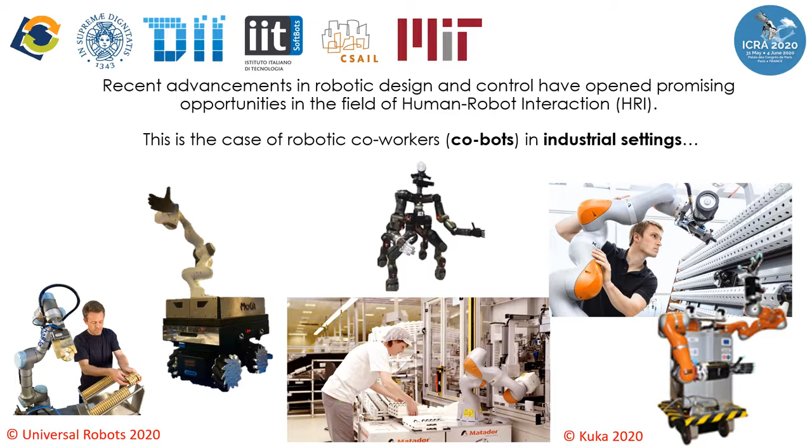Recent findings in robotics have enabled promising opportunities in the field of human-robot interaction, for example with the development of collaborative robots in industrial settings, but also with companion robots that can provide assistance in daily life activities.

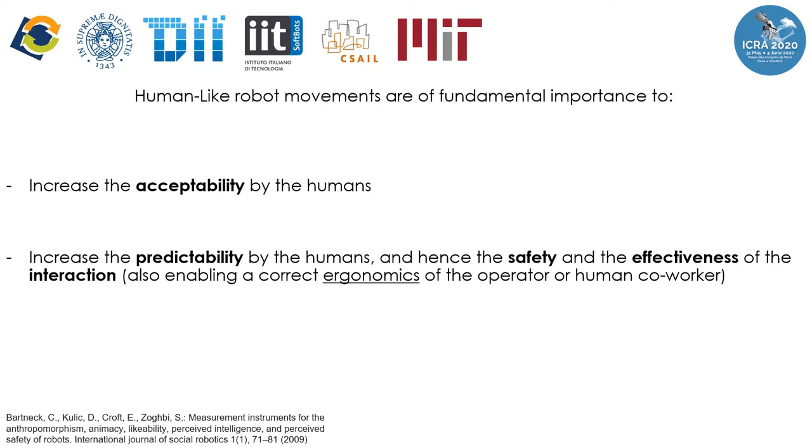All these applications share a common important characteristic, that is human likeness. This is important since it increases the acceptability of the robot by the human and improves the predictability of the motion itself, positively affecting the safety and effectiveness of the interaction. It is then clear that the generation of human-like movements is fundamental for the next generation of humanoid robots.

State-of-the-art solutions typically rely on the optimization of arbitrary cost functions or capitalize on heavy learning methods. However, this usually comes with certain limitations, such as limited motion variability and the need for very high-dimensional datasets.

In this paper, we propose a new architecture that is able to overcome these limitations. To do this, we leverage the definition of a basis of principal functions extracted from human movements. A reduced number of these functions is then enrolled in a planning problem. We defined an incremental procedure that enrolls the minimum number of these functions tailored on the degree of movement complexity required for the specific task. And finally, we defined a procedure to map the obtained trajectories on a generic redundant manipulator.

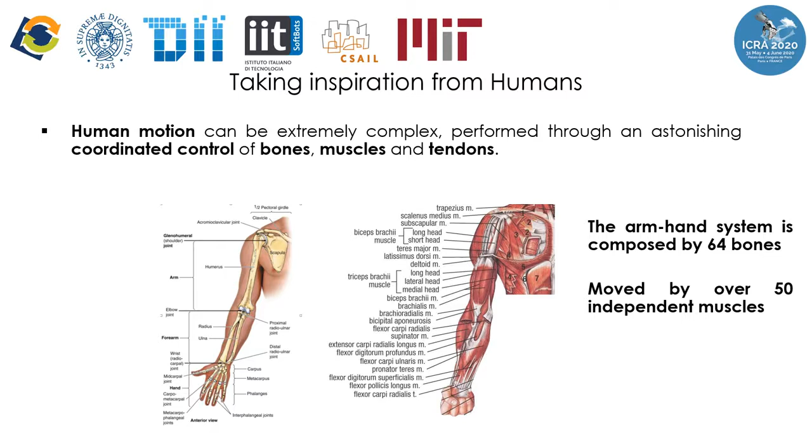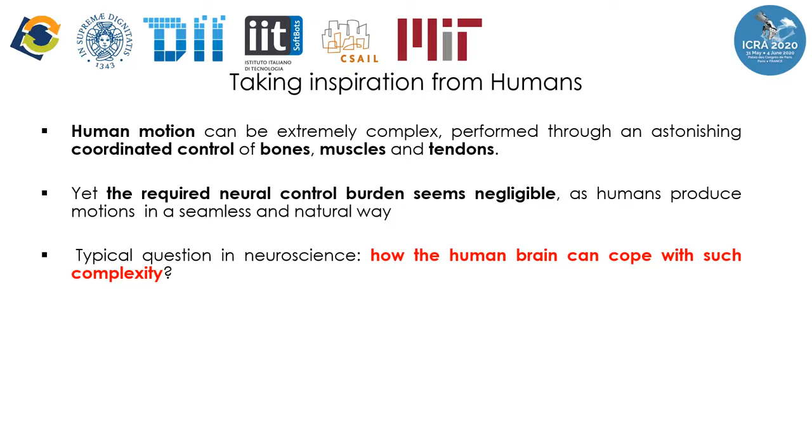Looking at humans, we observe a significantly high complexity, with more than 50 independent muscles used to move the upper limb. Yet, the effort required at the neural level to control such complexity seems negligible. So the typical question is, how can the brain cope with the abundance of our body? And this, in robotic terms, becomes, how can I simplify the problem of motor control to provide design guidelines for robots? We then need a tool to reduce the functional dimensionality of the movements.

To this goal, we used functional principal components. This can be regarded as a functional extension of principal component analysis. Each functional principal component will be a time vector, and a combination of a sufficient number of functional components can reconstruct all the movements.

And then we come to the functional analysis. The idea is to identify the first functional principal component as the function that minimizes its distance with respect to the entries of the dataset. Then we can define a second functional principal component that again minimizes its distance with respect to the entries of the dataset, with the additional constraint that this is orthogonal to the first one. And so on with all the other components.

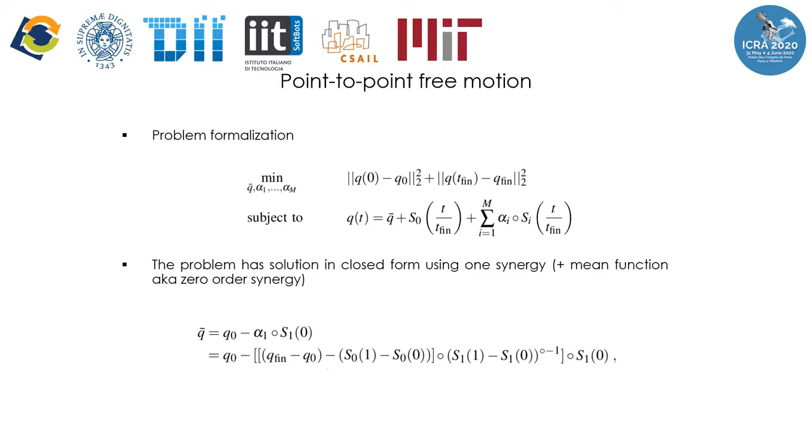The fact that we don't need to optimize for the generation of point-to-point motion gives the opportunity to include other characteristics, such as obstacle avoidance. We extended our implementation to the obstacle avoidance case by including a second term to the cost function. The role of this second term is to maximize the distance between the whole robot during the movement and the obstacles.

A recursive numerical routine has been implemented to solve this optimization problem. At the first iteration, a solution is searched with m equal to 1. In case the solution does not reduce the error below a desired threshold, the procedure is repeated by increasing the value of m, until the problem is solved with the desired accuracy.

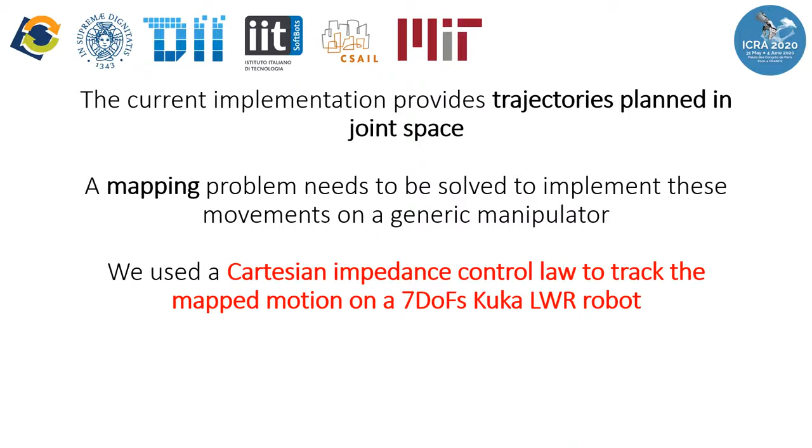A mapping problem needs then to be solved to implement this on a generic redundant manipulator. This is performed in this paper through a Cartesian impedance control. The torques provided to the robot will include a term that compensates the dynamics of the robot, its inertia, Coriolis, and gravity contributions. And then we will have a term that minimizes the error and its derivatives between the actual robot end effector and the endpoint of the 7 DOF model we used to plan the movement.

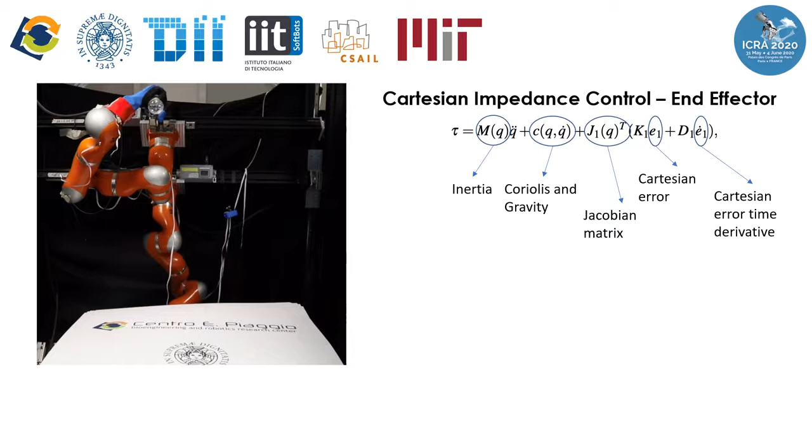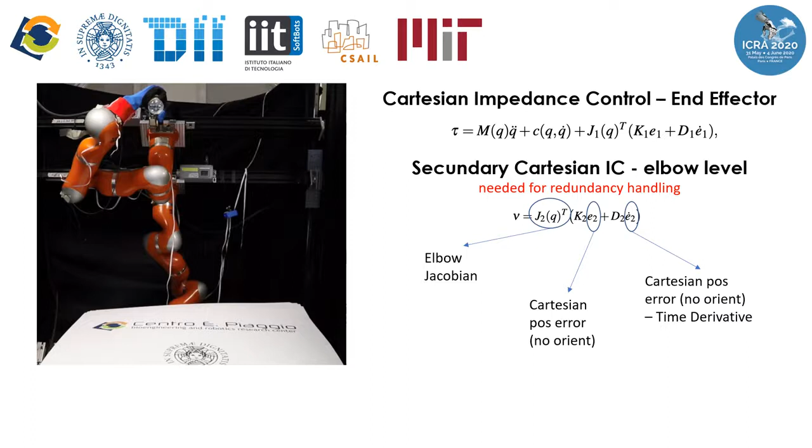To deal with the redundancy, we used a second controller at the elbow level. The goal of this second Cartesian impedance controller is to minimize the distance between the elbow of the robot and the planned motion at the elbow level. To keep the effects of the control uncoupled, we project the second controller in the null space of the first one.

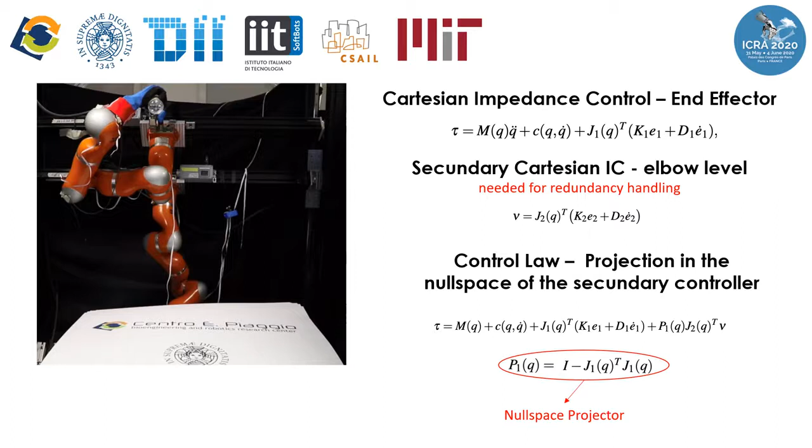Here we show an example of a typical reach-to-grasp movement in which the robot needs to move toward the left side of the table. The movement is mapped on the robot with good accuracy and preserves the characteristic bell shape of the velocity profile during the motion. In all our tests, although some oscillations are introduced by the robot, the jerk values are always below 10 to minus 2.

Here instead we have a case of self-feeding, when the robot is drinking from a bottle. Also in this case, the movement is mapped with very good accuracy and preserves low values in the jerk profiles.

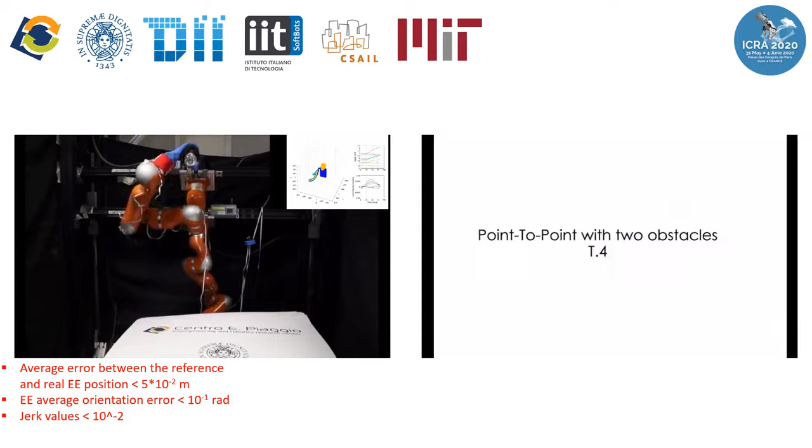In this video, we demonstrated the potential of a new algorithm for human-like motion generation of a generic redundant manipulator. We are now working to extend this approach also to the definition of impedance parameters.